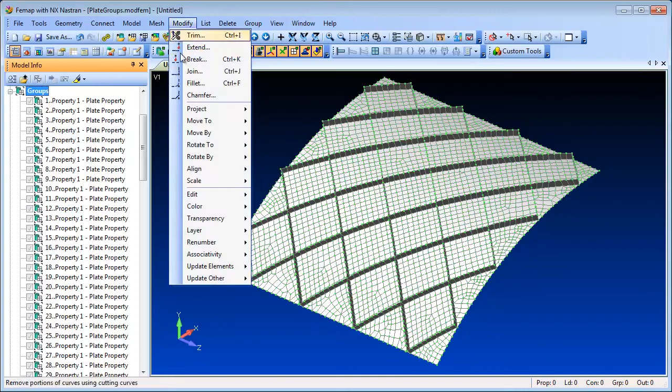In the Group Operations Generate command, there is a non-manifold edges option that will create groups of elements and nodes based on group boundaries, defined by non-manifold edges. So for geometry like this model that contains many T-junctions, the model can be broken up into separate groups for each panel and rib in one single command. In fact, in this example, 105 groups are created automatically, and to show the groups visually, we can color the groups with individual random colors.

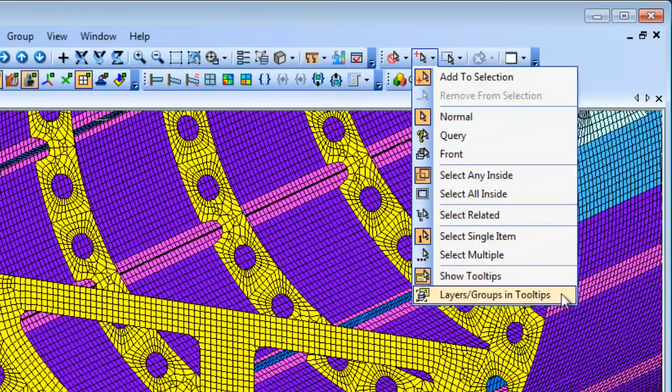In FEMAP 11.1, you can optionally include group and layer information when using the Tooltip Display. The information is also directed to the Entity Info pane to give you interactive feedback of the layer and group membership for the entities that are highlighted.

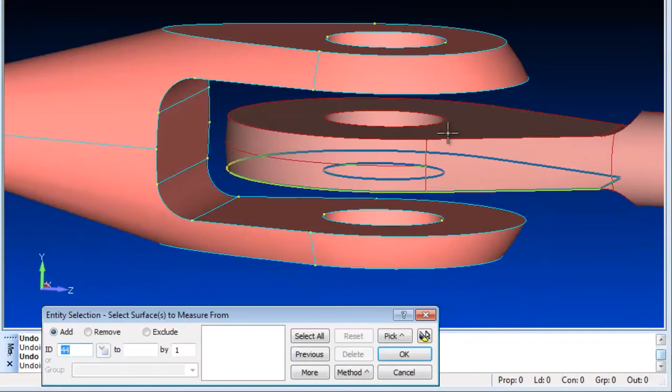FEMAP's measuring tool now includes a method of determining distances between multiple selected geometry entities. You can measure distances between different geometry entities and request the maximum, minimum, or both values between all of the selected entities. In a related capability, you can also create lines between the maximum and minimum, or both, points between multiple selected geometry entities.

In the Meshing toolbox, you can split a surface between two curves at their closest point relative to each other. This adds to the array of geometry editing tools and can be helpful for splitting surfaces in particular situations where there are no other obvious identifiers to pick.

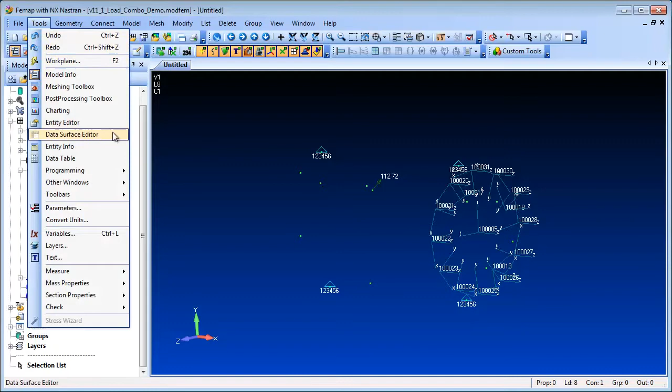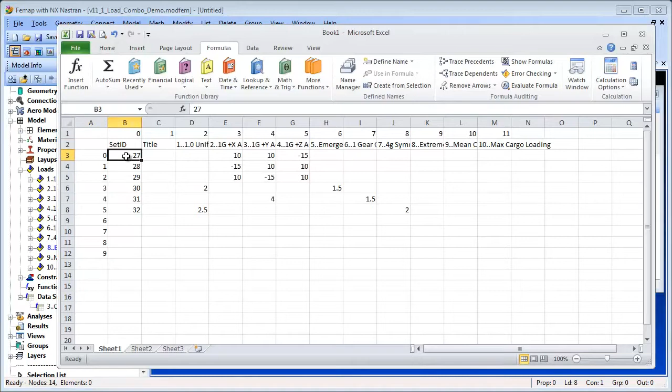A new data surface type in FEMAP 11.1, the load set combination data surface, allows a spreadsheet type method of creating and editing combinations of existing load sets. You can export data to Excel or edit and create the load set combinations in Excel and import them back into FEMAP to create new load set combinations.

With the combinations defined in the Data Surface Editor, you can right-click to sum forces and create new FEMAP load set combinations as defined in the table. The load set combination data surface makes easy work of setting up complex load set combinations.

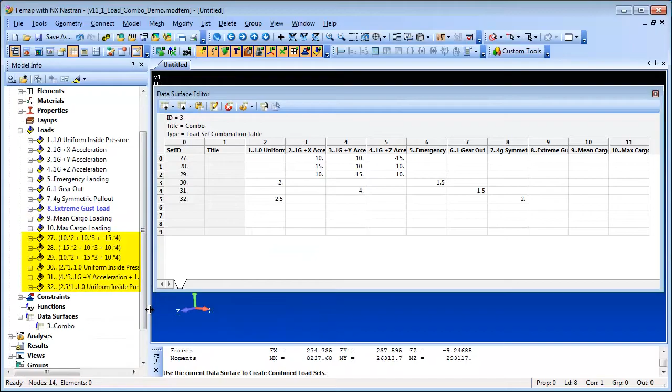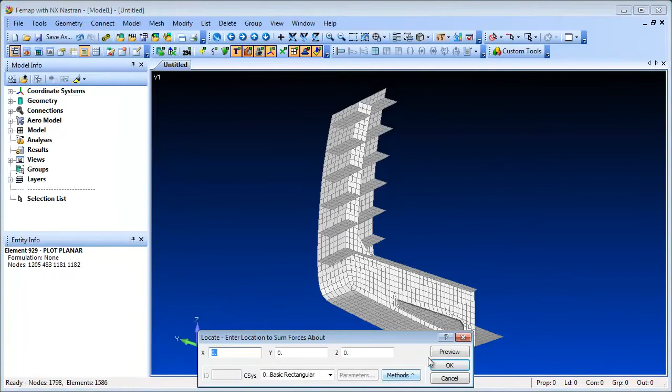There have been some extensions to the checking tools in FEMAP 11.1. For coincident nodes, you can now merge nodes with differing output coordinate systems. For force summation checking, the selections for a partial model are more explicit, allowing you to select particular nodes and elements or selected load definitions. Also, an option to include or exclude body loads has been added.

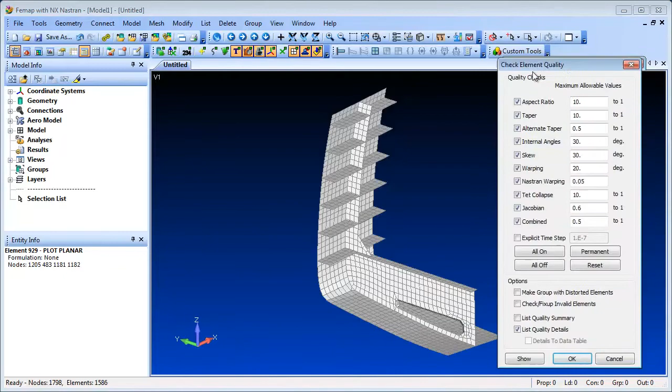For element quality checks, new All-On, All-Off buttons aid quality check criteria selection. A Show button highlights elements that fail any of the selected criteria, and you can obtain quality lists as a summary or in detail.

There is a new Entity Count button in the Model Info tree which displays a count of the entities in each section of the tree. The button toggles the Entity Count display on or off.